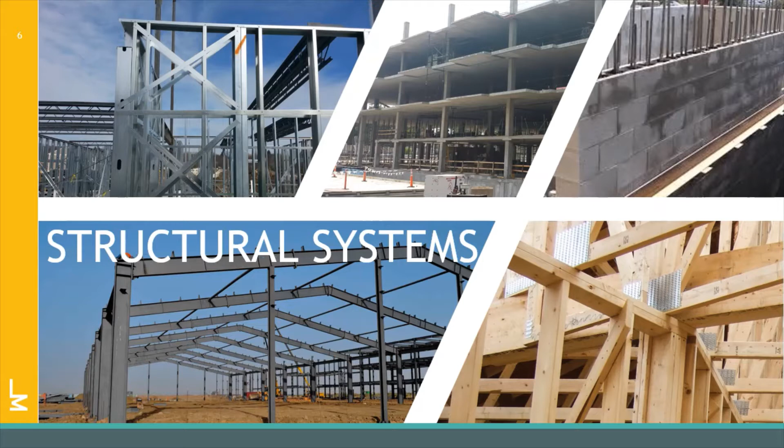The first construction type that we have here is conventional steel framing. This is definitely one of my favorites and one of the more common types of construction. A fun fact about steel is that it's the most recycled material on the planet, more than all other materials combined.

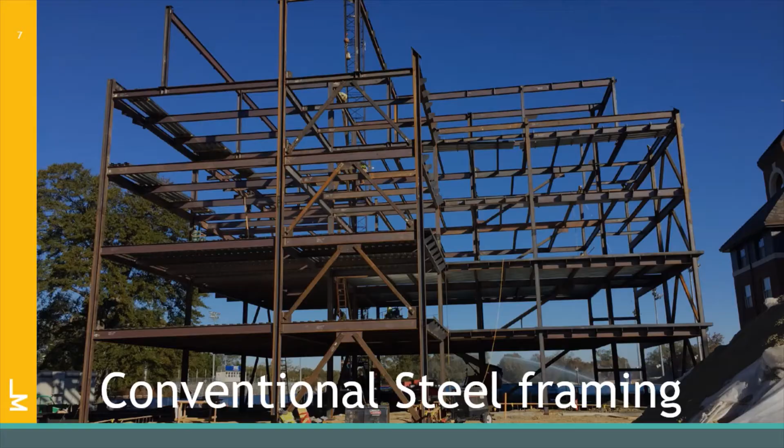Here we have what is called a composite beam. As you can see, there are some metal studs sticking up out of the metal deck. Below those metal studs are some structural steel beams. On top, they're going to pour some concrete. In our live demonstration, you'll get to see how composite beams act and where they get their strength from.

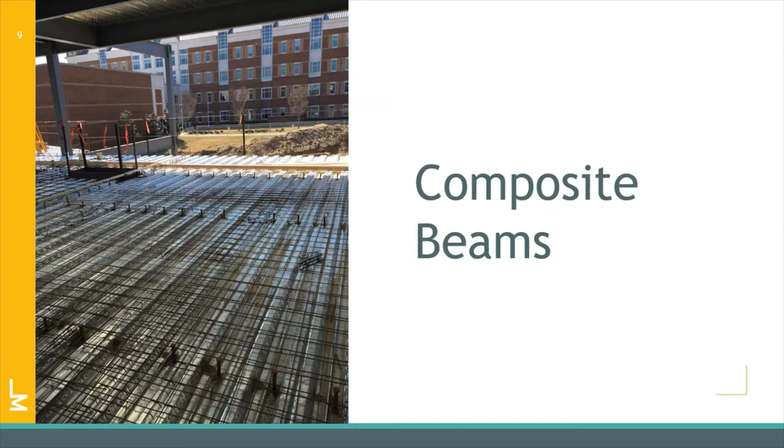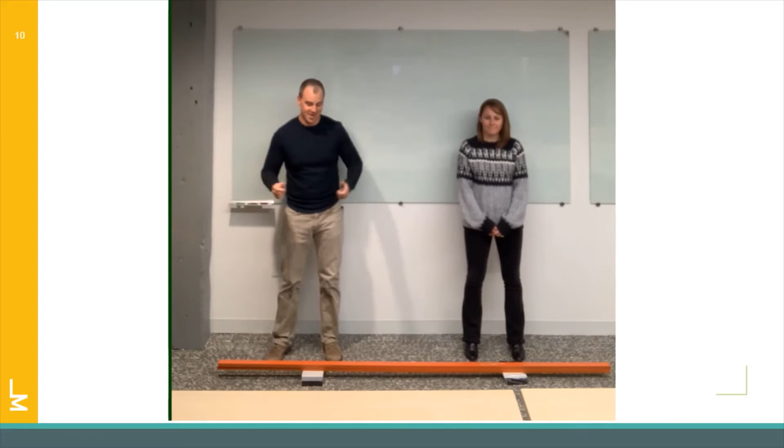Hey guys, I'm Brian, and this is Taylor. And we're with Lynch Mykins Structural Engineers, and we want to talk to you guys a little bit tonight about what structural engineering is. So when we talk about structural engineering, we're talking about the forces in a building, right? And how do we, as designers, account for those forces? How do we create the building in such a way that it can withstand all the forces safely and keep everybody inside safe while they're doing their thing?

So we have two types of forces that we work with primarily. One is gravity force, the other is lateral force. When we're talking about lateral force, we're talking about wind, tornadoes, earthquakes, anything that's going to make the building want to go side to side.

One of the most important parts of the building, though, is the gravity load resisting system. That's the system that you can apply your body weight to, or furniture to, or any kind of loading in the building that's going to be supported directly by the framing members.

So, to illustrate this tonight, we've got a beam on the floor, right? We look inside a building, most of the stuff inside a building can be reduced to beams. And whether you look at it to the left or the right, top or bottom, it's pretty much all behaving the same way. So Taylor is going to step on our beam.

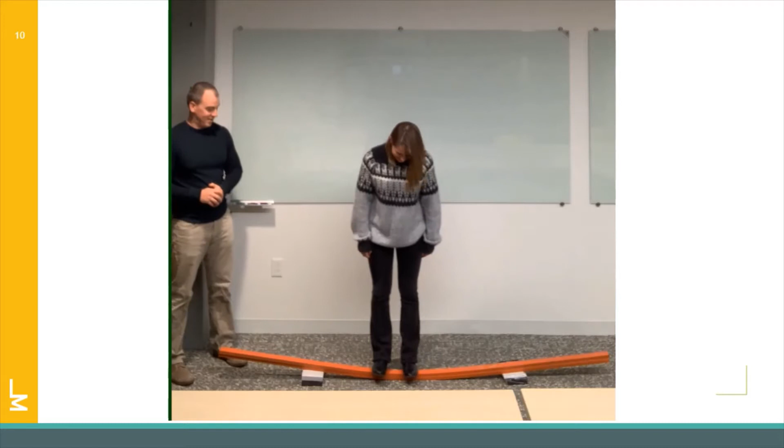And what do you guys see? You should see it sagging. You should see it bending like this, right? So what's going on in that beam?

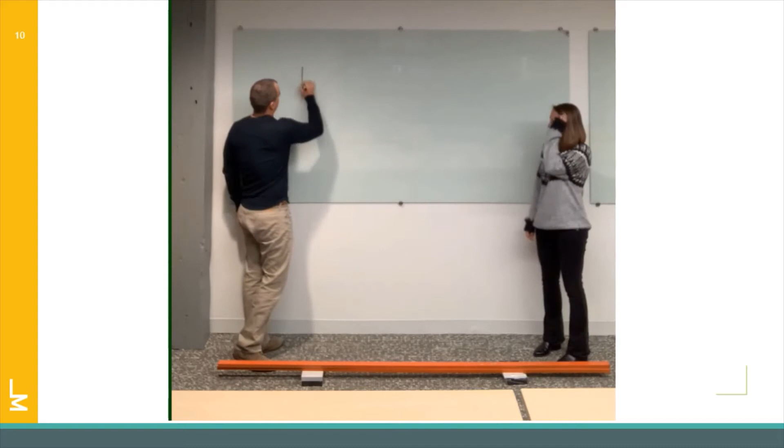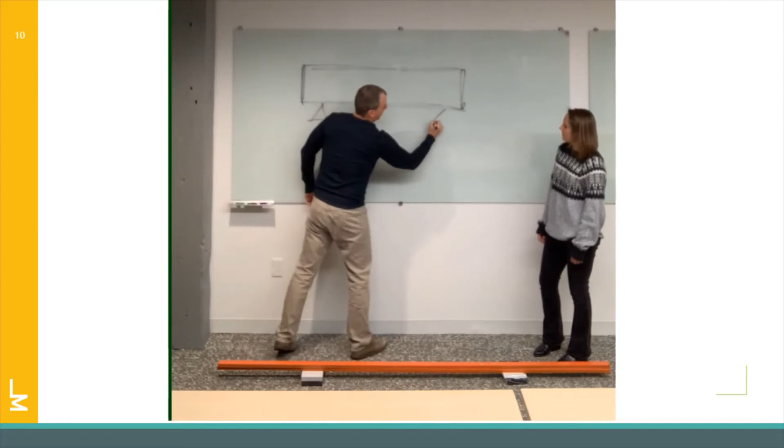We're going to draw it real quick here on the board so everybody can see. Here's our beam. Here are our supports. When Taylor stepped on it, she put a load right there in the middle of it. When she did that, the beam bent. It bent like this.

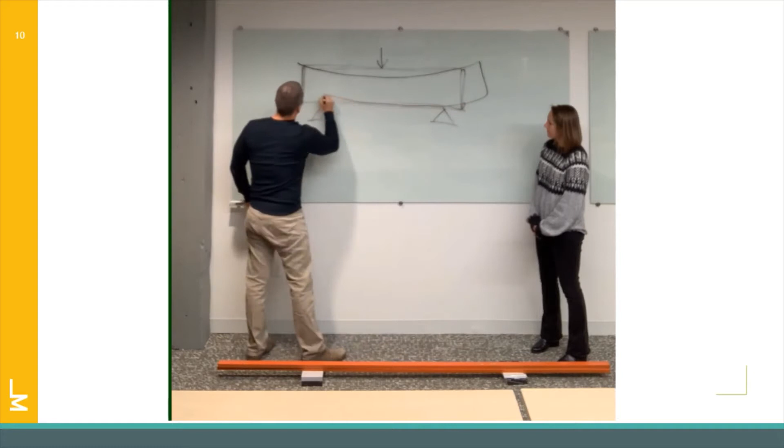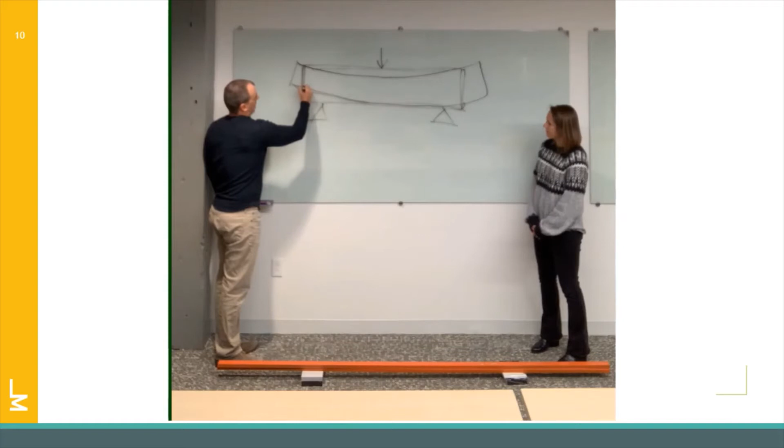Now, if I were to draw a line, a straight line, down the center of the original beam, that center line would be right here. When Taylor stood on that beam, that center line bent with the beam. So the new center line is right here.

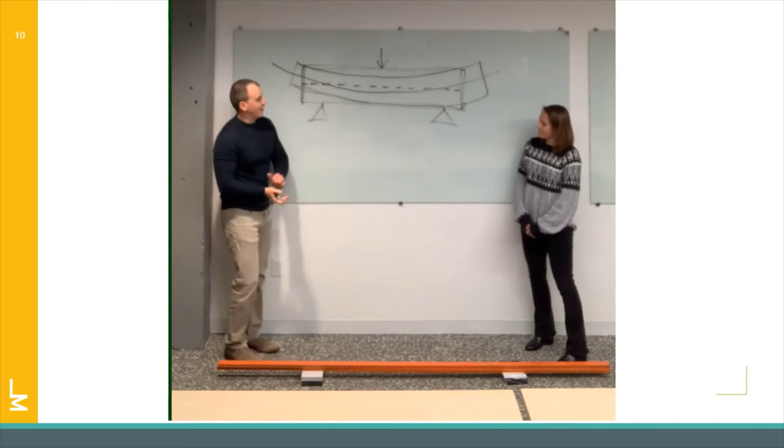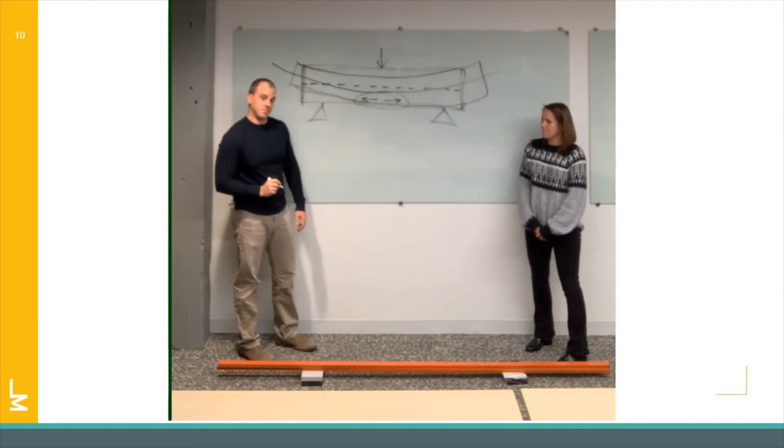Now, because of that, what do you think is going on in the bottom half of this beam, right here? Are the fibers pushing against each other, or are they pulling away? The answer is they're pulling away. They want to do this. That's called tension, the tension force. When you have two members that are pulling away from each other, that's a tension force. And in this bent beam, we're creating tension in the bottom half, so we're going to put a big T right here for tension.

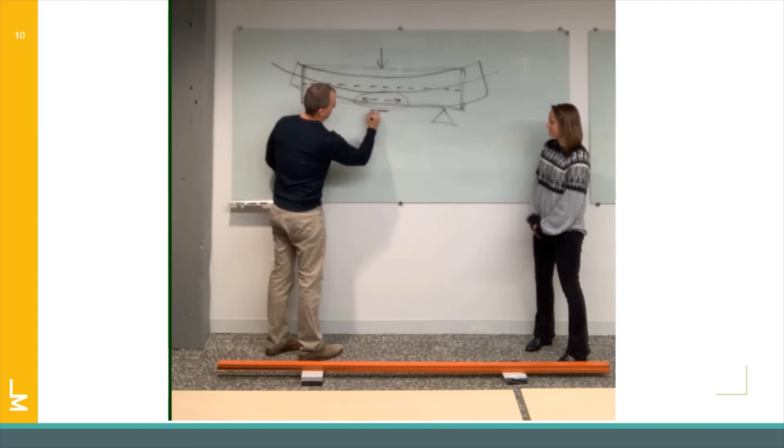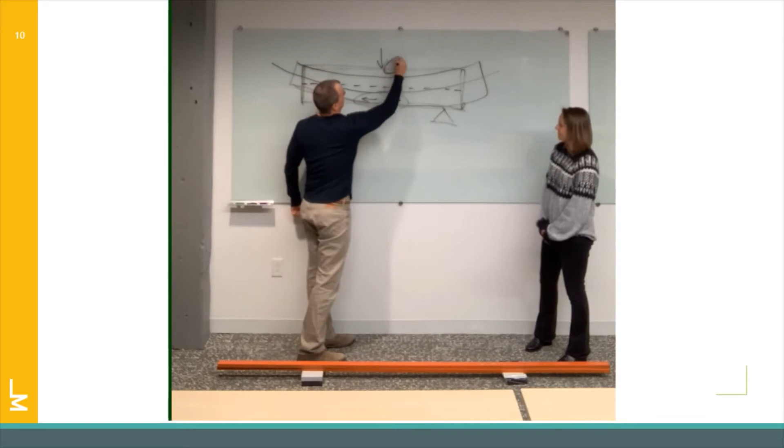At the top of the beam, are the fibers pulling away, or are they pushing against each other? The answer is they're pushing against each other. They want to press against each other. So that's called compression. We're going to put a big C right up here for compression, and two arrows to show that that's what's happening there.

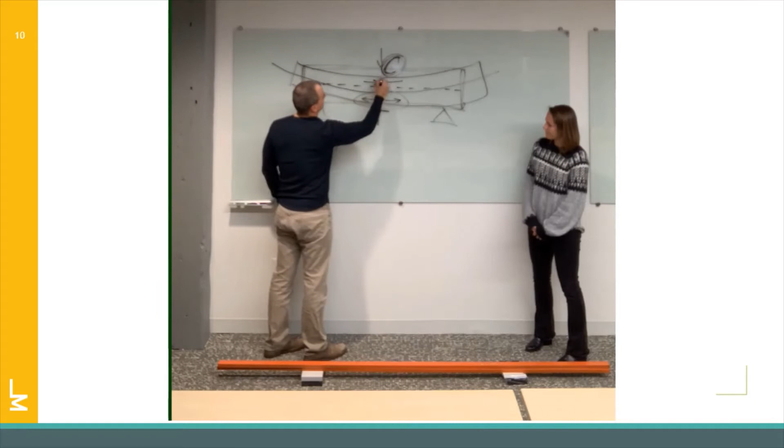Now, in structural engineering, we have two primary materials that we most often use. Those are steel and concrete. Steel is very good in tension, and concrete is very good in compression. But the best system of all is a system that utilizes both. We call this composite action.

In structural engineering, what we most often do is apply the steel where the tension force is, because the steel is better in tension, and the concrete where the compression force is, because the concrete is better in compression.

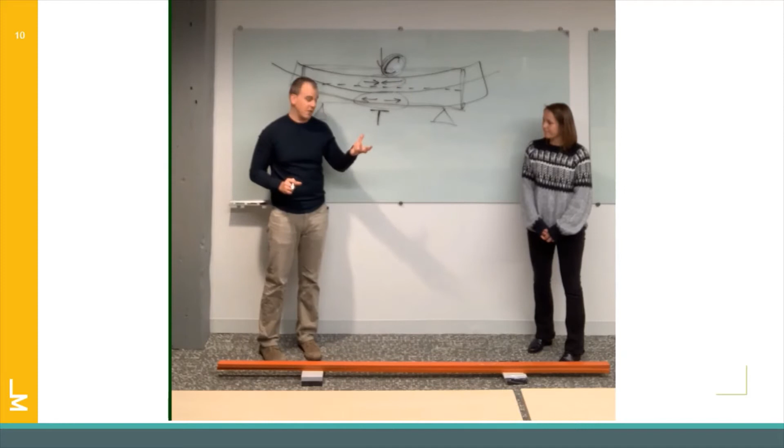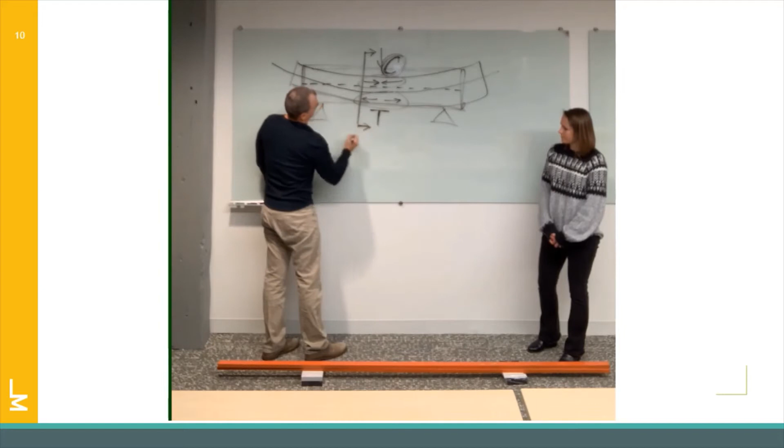So, what you'll often see, if I was to draw a line right here, and I was to cut this beam in half, and look this way into that beam, what I would see would be a piece of steel, an I-beam. We call it wide flanges, but an I-beam. And then on the top of this beam, where I have the compression force, I have a concrete slab.

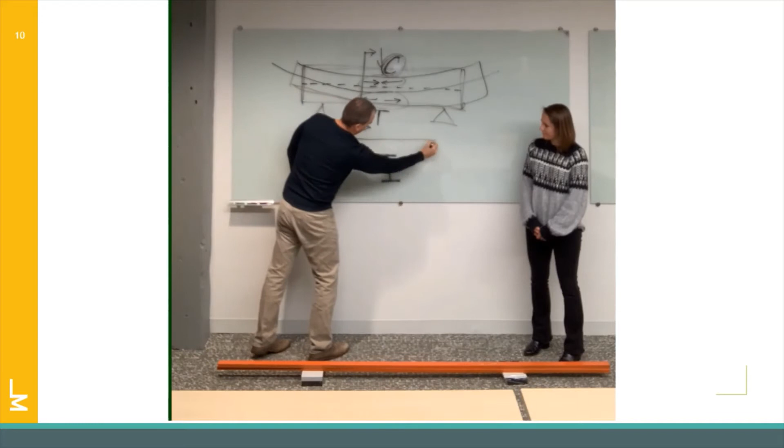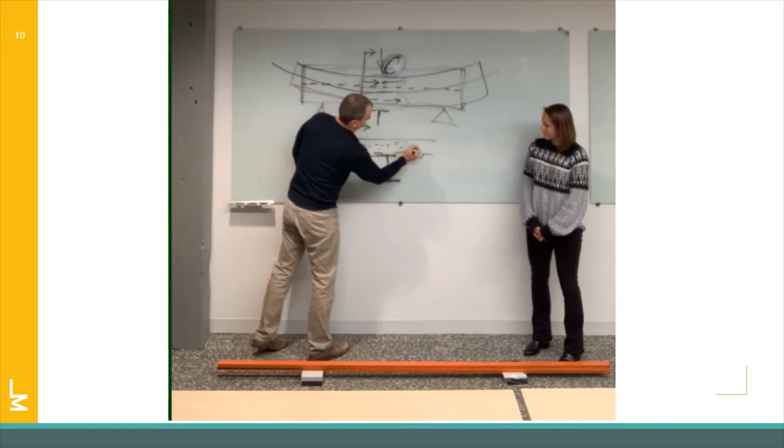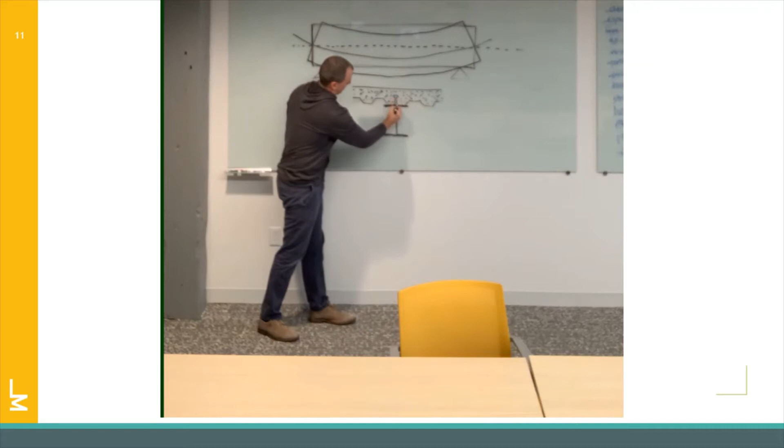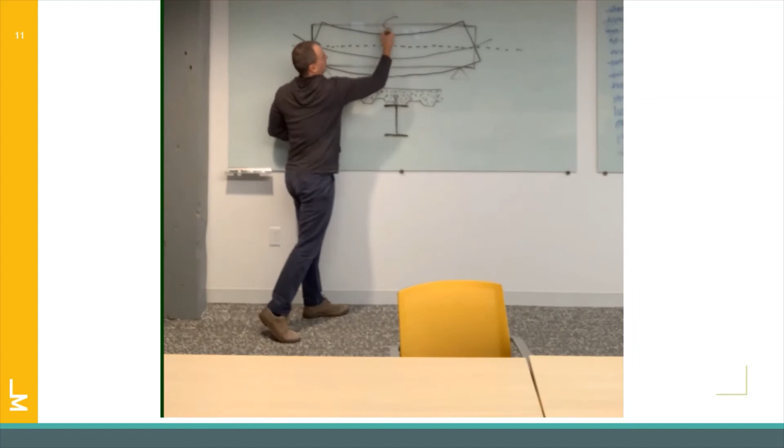Okay, so to recap, we have the concrete slab up top, we have the I-beam or wide flange beam below, and then tying those two things together, we have a shear stud. This way, the steel beam and the concrete slab are gripped together as one unit. Again, compression up here in the concrete, tension down here in the steel, and the whole thing bends together when the load is applied up here to the top of the beam.

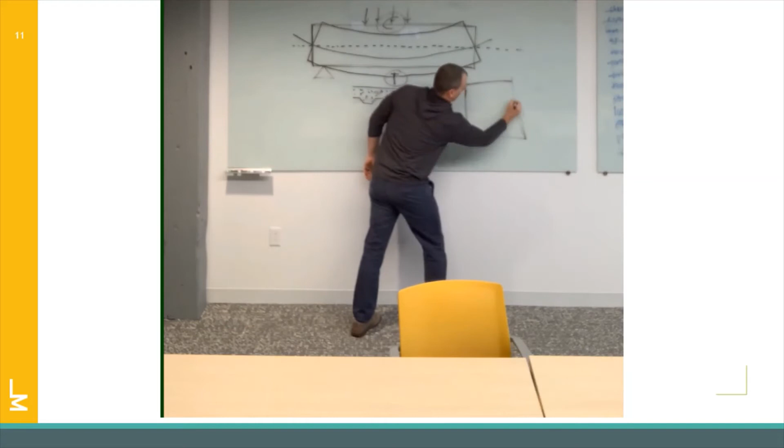There's also another primary type of configuration that we see a lot in buildings, in reinforced concrete buildings, where we actually are going to put the steel in the concrete. So if this was a cross section of our beam right here, and the entire beam was concrete, we would put steel rebar reinforcing down here in the bottom.

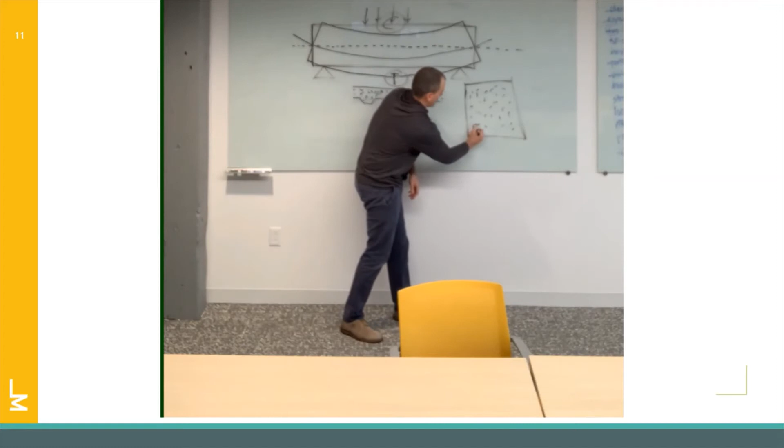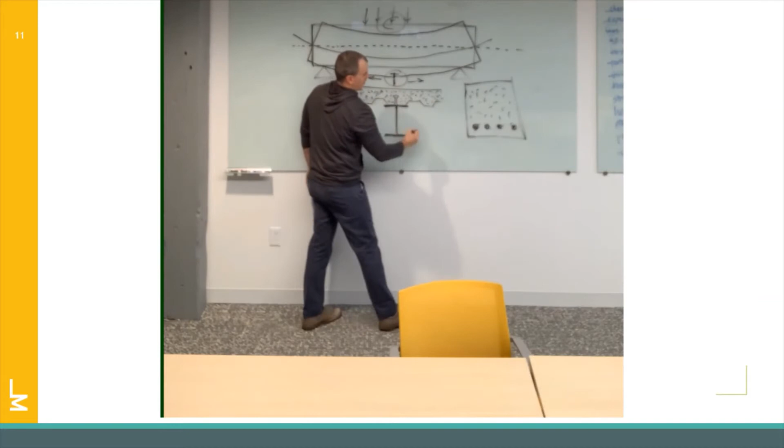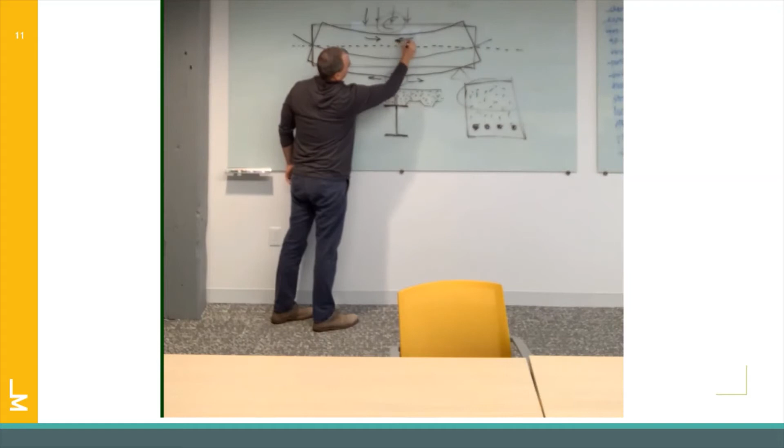Again, the steel, which is the primary tension element, is down here where the fibers are pulling apart. Concrete is up here in the primary compression region, where the fibers are pushing against each other. This way we make the most efficient use of both the concrete and the steel.

And that's structural engineering in a nutshell.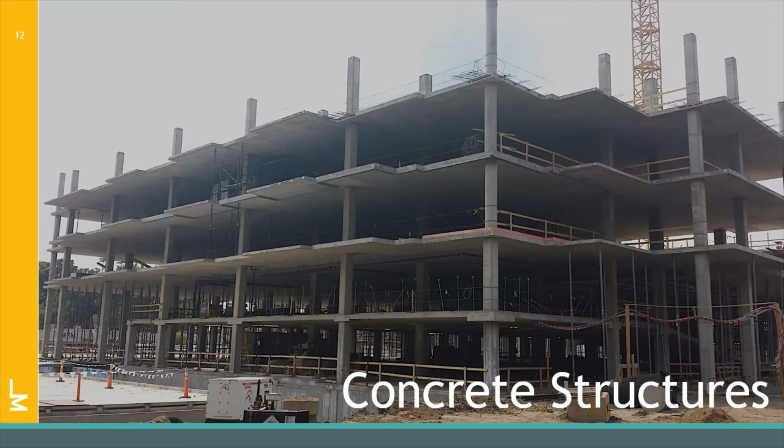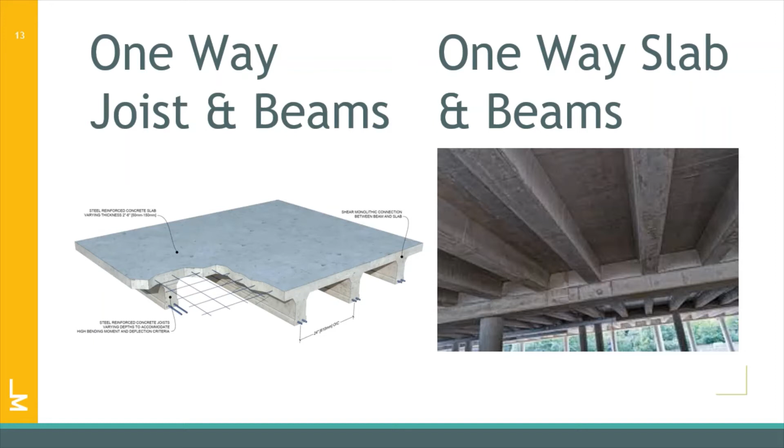Just like with steel, where steel has conventional steel framing, composite steel framing, and open web joist steel framing, concrete has lots of different options as well. We can form it into one-way joist and beam systems, one-way slab and beam systems. Depending on the loading criteria and the column spacing, this can be an efficient option.

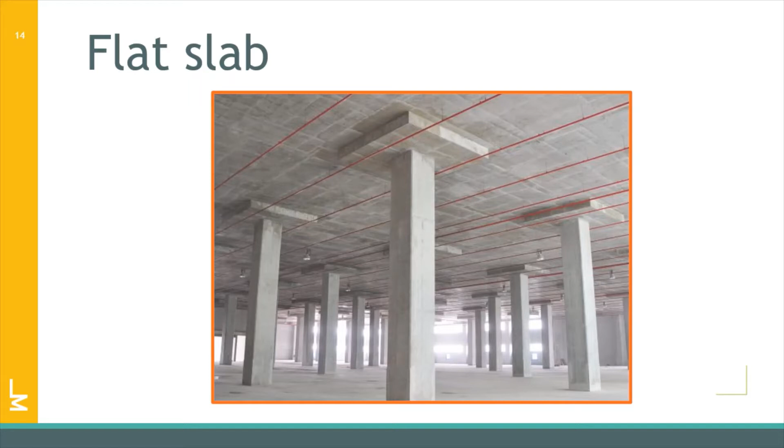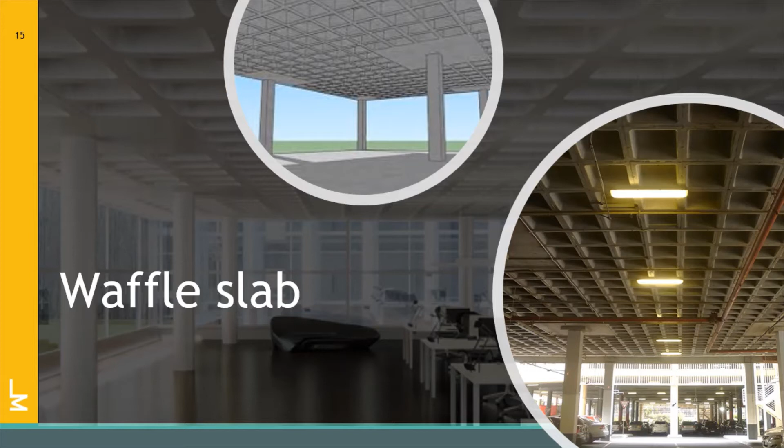Another structural concrete option is a flat slab. These systems are typically used when the columns are spaced a little bit closer together. Another concrete option is a two-way waffle slab. These are more commonly seen in older structures, so you may have seen these before.

The previous concrete options mentioned are what is known as cast-in-place concrete, where the concrete is poured on the job site itself. There are other options where it can be poured before it gets out to site, known as a precast system. This tends to be a little bit quicker.

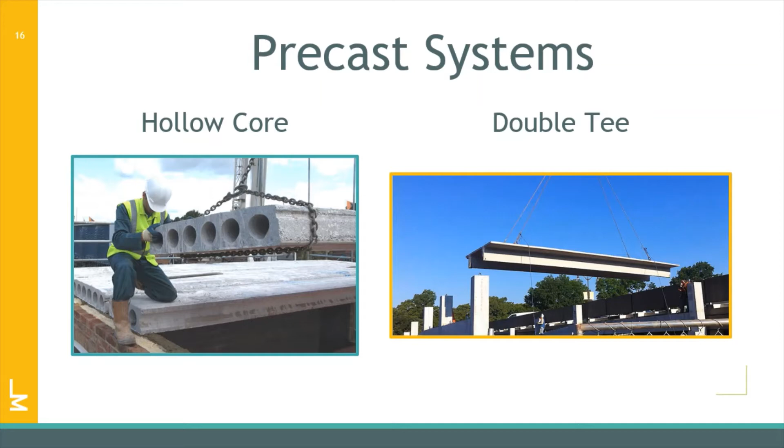Another construction material we have to choose from is wood. I can guarantee you that most of your houses are made out of this material. Typically, it's used in smaller buildings because of its ease of construction and ease of finding the material itself. It can be used for other small structures such as park buildings. More commonly, it's being used for architectural features and even in larger construction as mass timber.

Another construction type is masonry. Masonry is actually referred to as concrete masonry units. So it is made out of concrete, but it's modular, so it goes up pretty quickly. I'm sure a lot of your schools are made out of masonry, and you can look around on the walls in your schools and see those blocks.

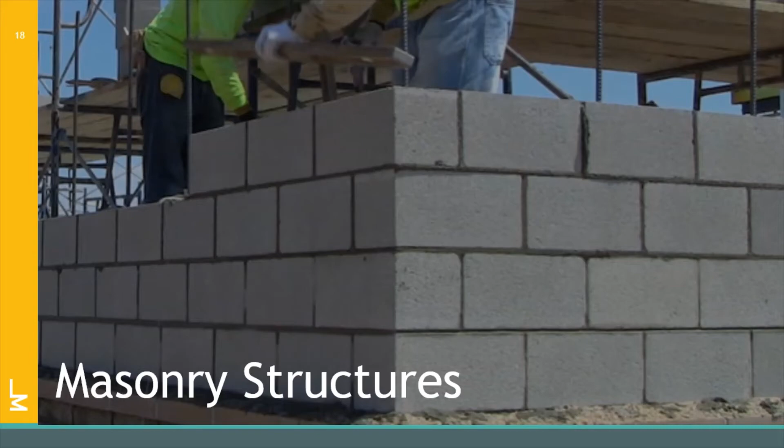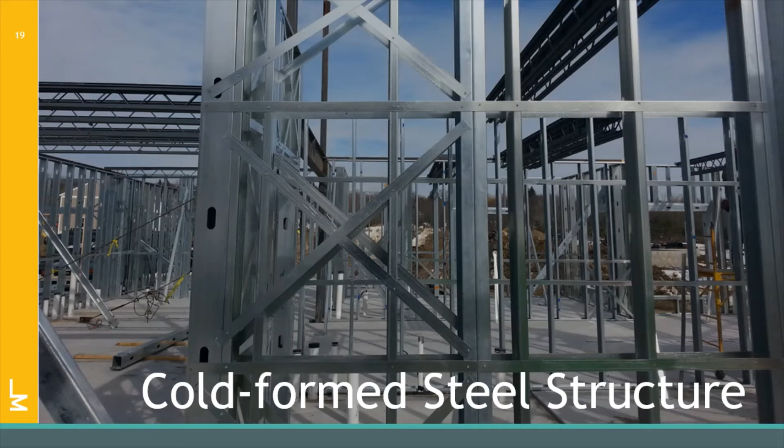Finally, we have cold-formed steel structure. This is different from the steel structure discussed earlier because it's known as light gauge. It's a lot lighter and less strong than the hot-rolled steel we talked about earlier. It's used in most conventional steel buildings as wall studs. So in your house where you have wood stud walls, in a commercial building you would have cold-formed steel walls. However, this material can also be used as the load-bearing wall system in a conventional steel building.

As we've gone through the different types of structural systems, I'm sure you've seen there are lots of considerations to take into account whenever picking a system. Some of those considerations are outlined below as building occupancy, loads and codes, site conditions, and serviceability.

The first consideration is building occupancy. Is this building going to be used for a hospital or a school, or is it going to be used for an office? These things can help determine our structural system.

Depending on what our building occupancy is, determines what loading criteria we have to use for our structure. That can be found in our codes that we reference. Our most common codes that we reference are ASCE 7-10, the International Building Code, and the North Carolina Building Code.

Another consideration we look at is the site. What type of soils are located on the site? Are the soils good or bad? With the help of a geotechnical engineer, we can help determine our foundation loading requirements.

Secondly, we look at where the site is located geographically. Is it located somewhere like Florida where there's really high hurricane winds? Or is it located somewhere like California where there's lots of earthquakes and seismic activity? Both wind and seismic play into our lateral load resisting system.

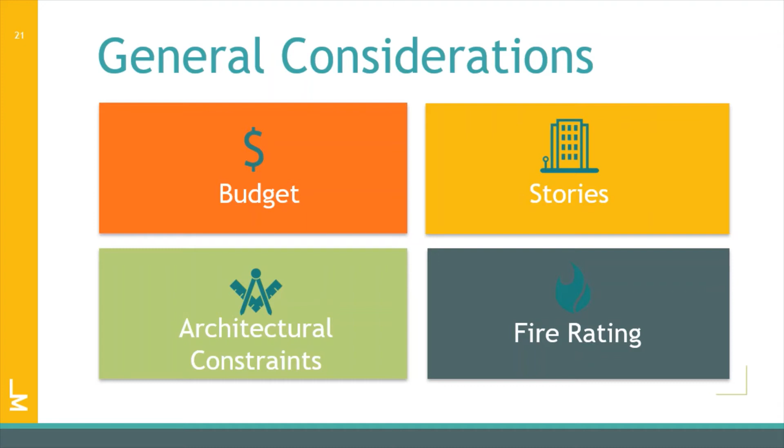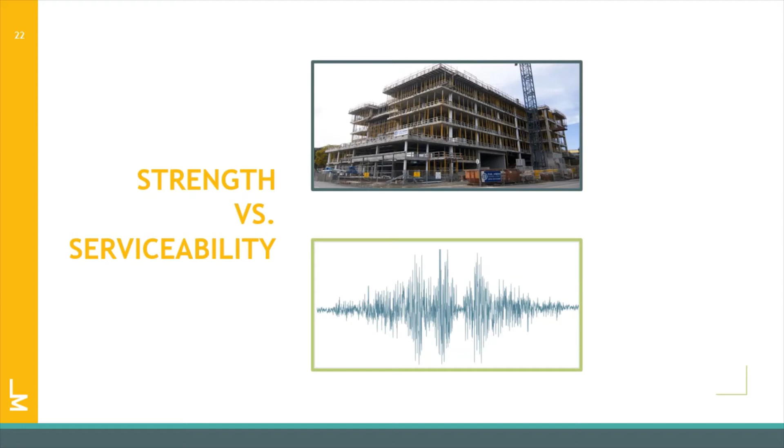Now that we've given you a big overview of structural engineering and what structural engineers do, how does all of that fit into this big AEC industry? You've seen lessons already on architecture, civil engineering, landscape architecture, and the list goes on. But where do structural engineers play into this?

Typically speaking, structural engineers work on a team with mechanical engineers, electrical, plumbing engineers, civil engineers, underneath an architect. The architect works with the owner.

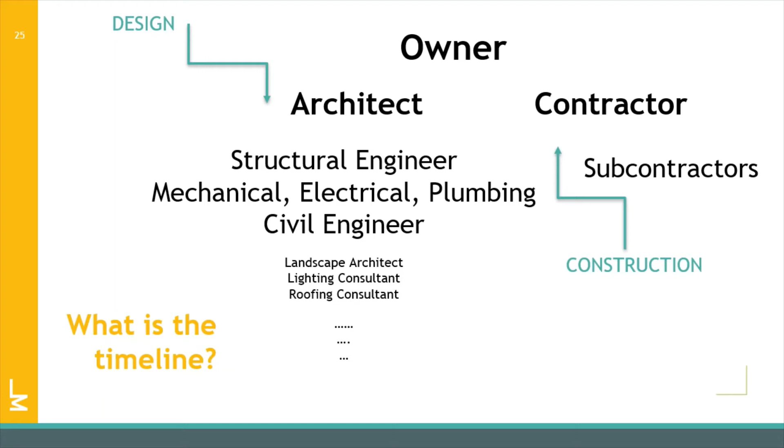As a structural engineer, we work with the architect through all of the phases, starting with schematic design all the way through construction administration. In schematic design, we're doing a lot of concept-only drawings. Then we progress into design development, where we start to add a couple more details and really get the design ideas fleshed out. Construction documents are the signed and sealed versions that we send to the contractor to build the drawings themselves. The construction administration phase is where we help answer any questions the contractor may have about our drawings.

The key to making any project go smoothly is open communication throughout the entire project, whether that's us communicating with the architect, the other consultants, or the contractor, and sometimes even the owner themselves.

What does the AEC industry create together? Our projects can be as large as an outlet mall, or they can be as small as a shelf. As a structural engineer in the AEC industry, we get to touch on a lot of really cool projects, from hospitals to schools, or even weird projects like zoo exhibits. There's never a dull moment, every day is different, and we're constantly using our brains to solve really complex and cool problems.

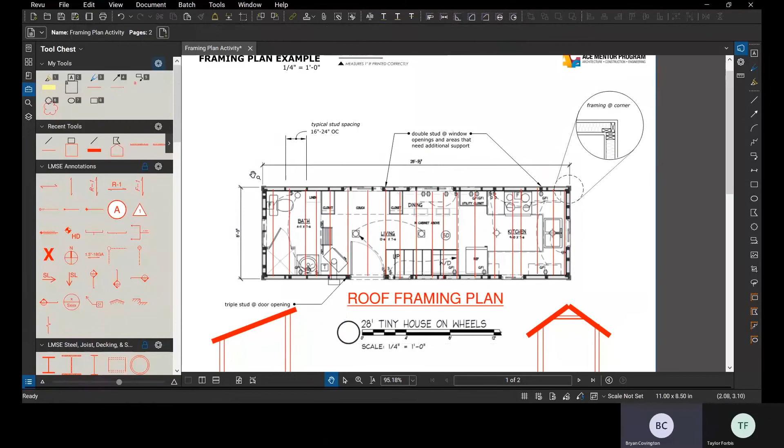The rafters then span like beams. If you guys remember our example from the video, they span like beams between the 2 walls, and they carry the weight of the snow or the shingles or the people, whatever's on the roof, between the 2 walls. We've drawn 2 cross sections here below.

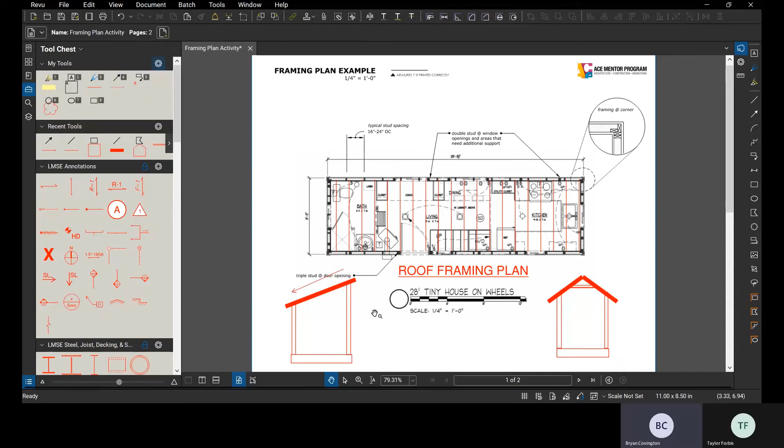The cross section on the left is what's called a shed roof. In this type of roof, you only have one slope. You can see the high side and the low side. The water, when it rains, drains down, obviously by gravity, to the low side and pours off. Now, the other typical type of roof is called a gable, and over here on the right, you see the typical gable framing.

In this scenario, you have a high point in the middle, called the ridge, and then rafters on either side sloping down away from the ridge, so that when water falls on this, it drains off at each side evenly. What we've drawn in our roof framing plan is an example of a shed roof because we only have one line of rafters. In your activity, you can choose which one you'd like to draw.

If you were to draw a gable end roof, you would have a ridge board running right down the middle, just like that.

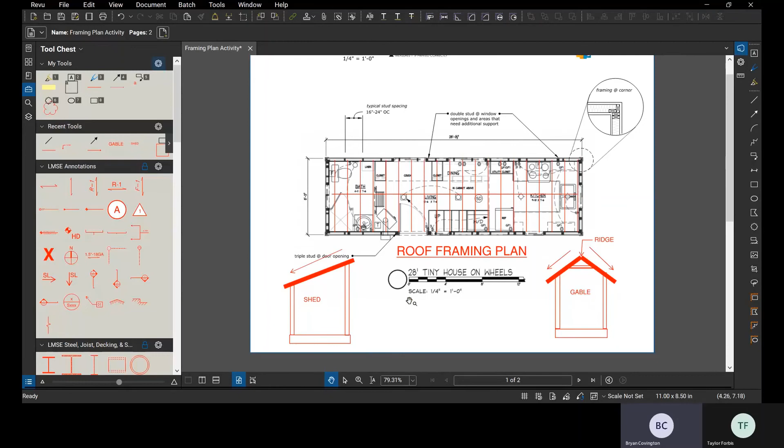Next we're going to talk about the wall framing of the house. In these two cross sections we've drawn, studs are on either side, and in actuality studs are on all four sides of the house. These studs have to do two things: carry the weight of the roof down to the floor, and resist wind pressure against the side of the house.

These two things combine to determine the maximum spacing that the studs can be. When we talk about stud design, we're talking about compression generally on one face and tension on the other face. So it really resolves itself to beam action, similar to how we talked about in our video.

Once we've determined the spacing of the studs, which again is typically 16 inches on center, we can then determine what type of wall sheathing we want to use. Usually about a half inch thick plywood is typical for your sheathing on exterior walls.

You're probably wondering, what about the holes in my walls, my windows and doors? This is an interesting scenario because we have weight coming down from the roof above, and we need to spread that weight out into the studs at each side in order to make room for our door. When we do this, we use what's called a header, a small beam that runs across the opening of the door, spanning between stud packs at each end. This beam is sized for the total weight of all the rafters that land on it.

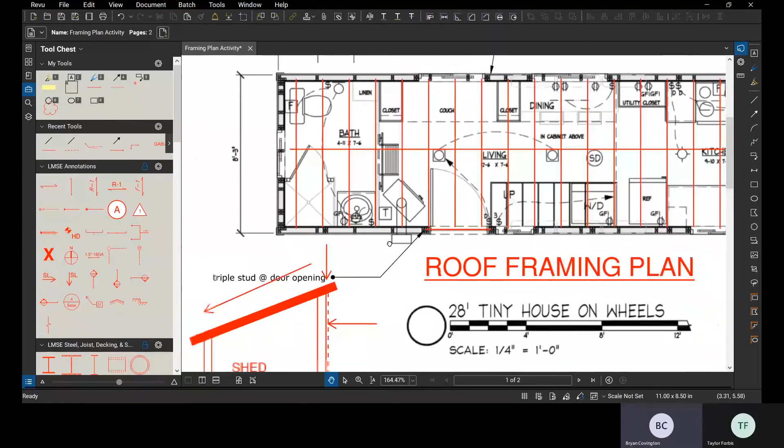In this picture, we would size this beam for the weight of two rafters bearing on it, and then size our stud packs at each end for the number of studs required to carry that weight down to the floor below. In your activity, it's not necessary to determine how many studs—you can just put a pack there.

After this, we're going to move on down to the floor. Again, it's similar to the roof in that each floor joist has to carry the load applied to it. Loads for your floor are going to be you and me walking around, furniture, refrigerators, TVs. You could have dead loads from carpets and floor finishes—all kinds of things that would create load on your floor, pets for example.

What we're going to do is utilize that same beam action we talked about to size joists that will span from one exterior wall to the next. Typically these are going to be 2x8s or 2x10s in tiny house construction, or in any house construction really.

If we go back to our previous slide, you'll see at the bottom of each of these two cross sections a representation of the floor joist down here.

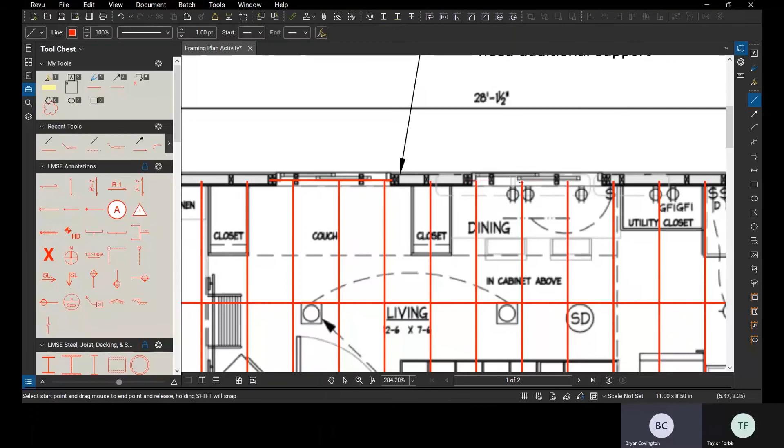One unique thing about your tiny house is that you have the option to put a loft level inside.

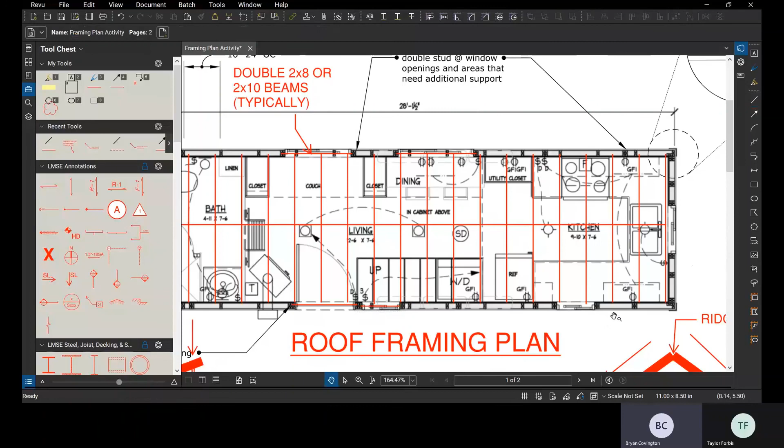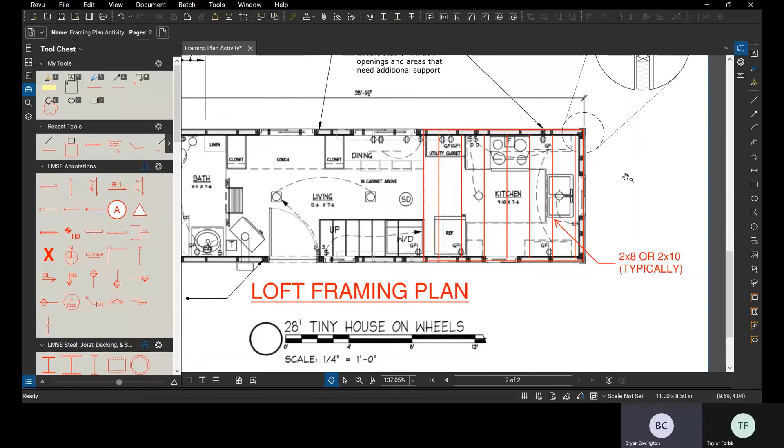If you were to put your loft over your kitchen, you would need to design a floor system for that. Again, your floor joists of that floor would span from exterior wall to exterior wall and be sized to carry the load of whatever would be in that loft. Bedroom load is a little bit lower than typical floor design load, so maybe you could get away with using 2x6s for this span.

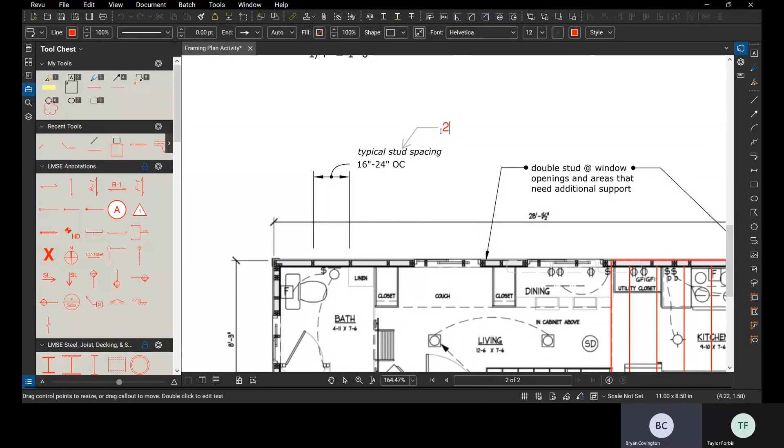Your typical wall studs are going to be 2x4s, and the roof rafters for this could be 2x6s.

So have some fun. Jump in there, draw some stuff, sketch a little bit, think about the ways that your tiny house would be framed. Hope you guys enjoy.